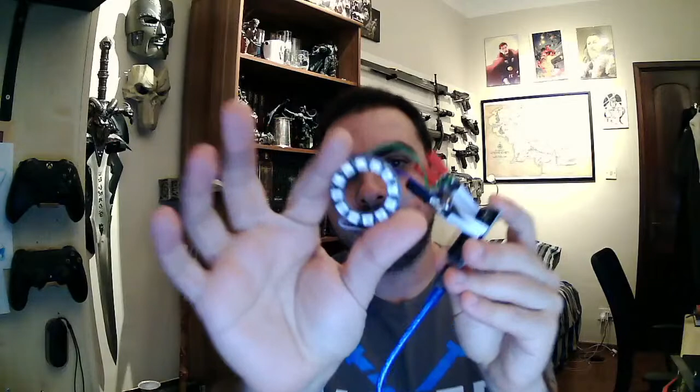And basically, this is a NeoPixel ring, an array of LEDs - in this case it has 12 LEDs, so they all light up in different colors. What I've done is soldered some wires onto their terminals and hooked them up with alligator clips, which are insulated by some electrical tape because I don't have the small feather pins for this kind of thing.

So yeah, I've been working on that and managed to successfully make it work. However, the first thing I noticed is that the blue LEDs don't work. It could be that this NeoPixel ring is faulty - I don't think this one is by Adafruit. Then something happened, something shorted out and smoke started coming out at like 1:30 in the morning, so I started to panic. But when I plugged it in again, the red LEDs worked, which is basically what I need this for, and the green LEDs didn't work anymore.

Just to show you what it's supposed to do, I've got a power bank here. I'm hoping I can hold it like this very gingerly so as not to cause any damage. I can't tell you what project this is for, but I can show you hopefully. Let's see, yeah it's on. I don't know if it's visible on camera, but the LEDs are lighting up and flickering randomly, making a flickering effect which is going to be used in a future prop project.

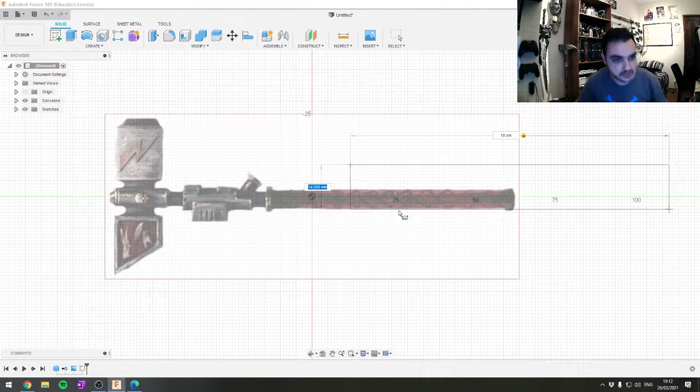I can quickly draw - actually I can get a box on this plane, and it's going to be 10 millimeters - oh no, let's do it like that, 100 millimeters, okay, so that's 10 centimeters. You can also write 10 cm over here. And the fist will, let's say I want to hold it in this position - obviously this will depend on the dimensions of the broomstick or whatever. I can use the stave back here, which is about 2.5 centimeters, yeah, about 2.5 centimeters, so I can do 2.5.

No, sorry, 2.5 cm. I'm not quite sure, 100 millimeters and 25. Yeah, okay.

So this box will represent my hand. Obviously, as you can see, the canvas itself is extremely tiny in comparison to the dimensions of my hand. So what I need to do is calibrate the canvas.

Okay, now if this is 10 centimeters, from here to here, let's hide it for now, we won't actually use that. And let's say I want this weapon to be a meter long in total.

I can right click on the canvas. Why is it not letting me? Should be able to right click. Oh, right, because I'm moving it. I should be able to right click on the canvas and calibrate.

Basically select 2 points on the image. Let's select the very top, it doesn't need to be very precise. Move the canvas over and select this over here, and currently that is a total of 126 millimeters, which is 12 centimeters. It's tiny. We want it to be a meter, so we do 1 meter.

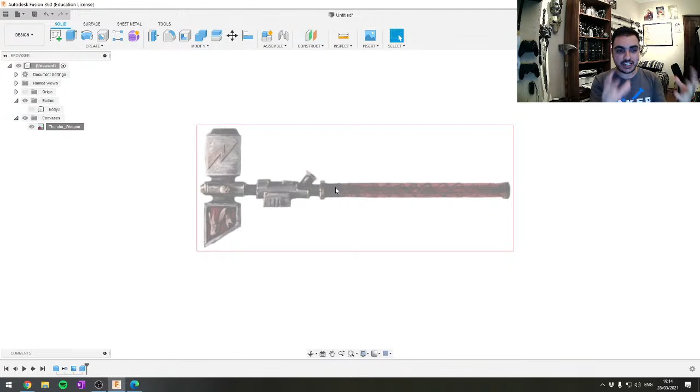Now remember that box before? See, that is basically the thickness of the area. So basically in terms of where my hands would go, if I have one over here and one over there, I think that is plenty of space to hold the hammer.

Okay, so like a small two-handed hammer. But as you can notice, perhaps it is a little bit too thick around the handle, the shaft there. So I will need to make some concessions.

Now, luckily, I can calibrate this to 2.5 and see. I can calibrate the thickness to 2.5. Let me remove this, let's recalibrate the canvas.

So let's take over here, and let's say we want this to be 2.5 centimeters, which is going to be the thickness of our dowel, whatever it is. Okay, and now let's see how long the whole prop is.

Basically, we can calculate how long it is by creating a line from this end to this end, and it will tell us it's 655 millimeters, so that's 65 centimeters, a bit more than half a meter. Now this is 30 centimeters, so 20 more would be about double, roughly.

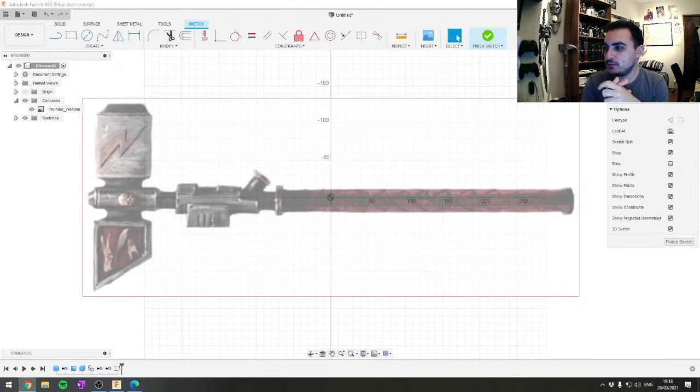Before any further ado, let's get to sketching. I'm going to be using a mixture of techniques, but I'll try to run you through it. I'm going to start with drawing some rectangles.

I can see that over here there's a bevel, so obviously the hammer is going to be beveling inwards, but that's something we can fix in a few steps later on, once we start extruding the model in 3D space.

Now over here I'm going to be taking approximate dimensions. I'm not going to follow the exact dimensions that I have on this, but I'm going to try and make it look right and make sense.

Basically I am selecting the rectangle tool over there, selecting the plane I want to extrude, and doing this. This is going to be the main head, the main cheeks of the hammer.

Now obviously this is going to be aligning with it, so I need to make sure that it is of about the same thickness. I think it's going to be 75.2 — let's leave it at 75.12. It's aligned.

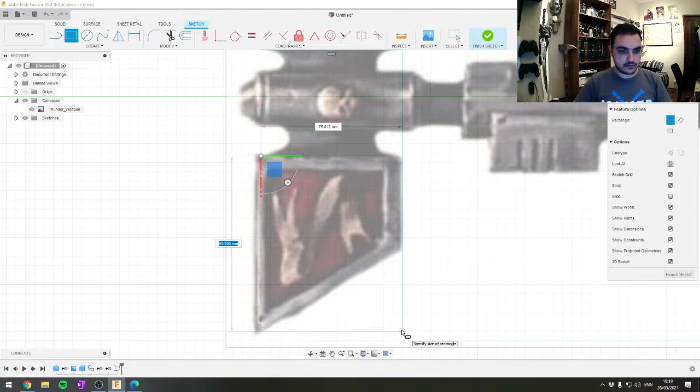Now I can do this. I can take the line tool by pressing L and extending it to wherever I want. Then I can deselect the line tool, select the border between them and delete it, which gives me a whole face.

I'm not going to worry about the recesses yet, because when I want to extrude, I want to do those recesses on the other side, on a 3D plane. I want to engrave them in, sink them in.

Even when I'm extruding, I'm going to extrude half the hammer and then mirror it, effectively cutting my work down in half, so both sides of the hammer will look exactly the same and I won't have to worry about displaying one side more than the other.

Once I have the whole model, I'm going to cut it up into separate pieces, and that's just to allow for ease of printing.

Not everything will be 3D printed. The shaft obviously won't be printed, but we're going to have the head which is going to be 3D printed, this sort of greebly thing over here, and perhaps this part over here.

I think these rings I'm going to 3D print and then color them in brass. Other than that, I think everything else is going to be like wood, but there isn't much else left, like the leather and wood. So that will be interesting.

Now over here I'm going to have a cylinder — actually I'm not going to do that right now, I'll do that later. Or actually, let's put a rectangle so at least we can keep in mind where it's supposed to go.

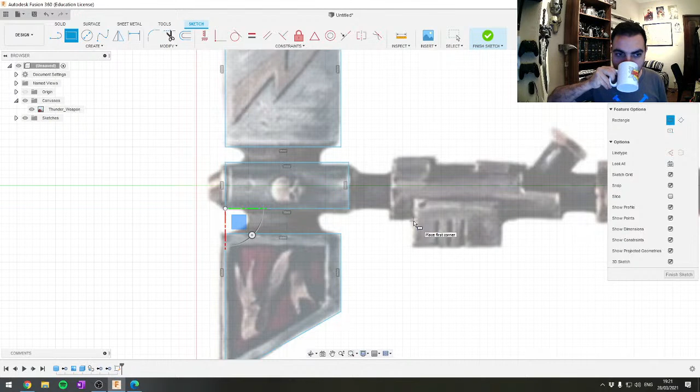The way to make everything in 3D is to extrude. Actually, before we do that — no, let's keep it, let us just extrude.

So we're going to press escape and then finish sketch, and it's basically giving us under sketches. Let's rename this to hammer head.

We can rotate it whichever way we want; I prefer working like this. So what we're going to do is select them by holding Control — actually we just need to select these two, pressing Control because these are the two faces which are going to be in similar dimensions.

We're going to go to extrude by pressing E. If I press E or go to create, over here we've got the extrude option under create and extrude. It's going to highlight them and give me the extrude options. As you can see, if I move it around, I can extrude it however much I want.

Now, this is going to be a longer piece, but it's a square face, so I have to make sure that however wide it is, it needs to be extruded up.

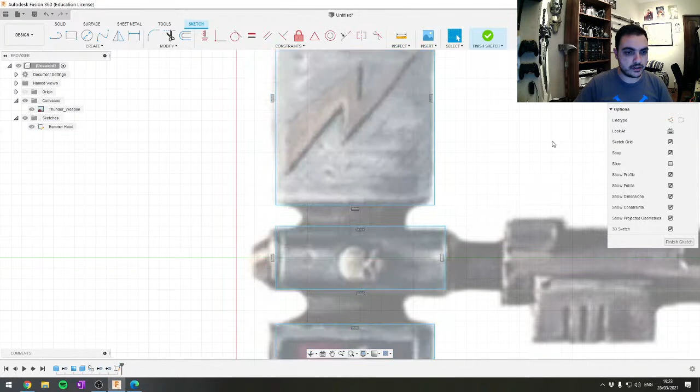However, if I take the dimensions, I can measure by pressing the inspect tool, select the two sides. No, not from there. I want to inspect this and this. The distance is 75.12. Basically, I can click to copy.

Now, when I go to extrude, press E. I can put my distance over here is going to be 75.12. However, that is the whole thickness of the hammerhead. I want it to be divided by half because I'm going to mirror it later on. So I am going to be working on half the hammerhead.

Basically, if I do slash 2, meaning divided by 2, if any of you use Excel, it will give me a thickness of half my width. Okay? And this is what we'll be working on right now.

Now, over here, I can see that we have the bevel going down. So let us press L to create another line and click on the surface, and we'll be creating a line over here. Now there are many ways we can do this, okay? So I just outlined this.

I can split this part, and I think that is what I'm going to do. Because basically, first let's see how far we need to go in. So this is 15.65. Let's copy that, 15.65. The split is just there to show me how much distance I need to the edge.

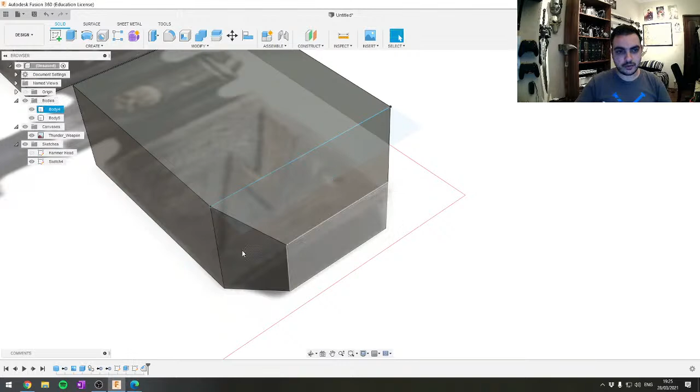I can take the sketch, I can delete it, it won't affect anything. And if we go back to the top, you'll see that this is about what we want.

However, I seem to recall that these hammerheads were not exactly continuous in facets. I think there's a little bit of a dip. So what I think I'm going to do now is either extrude the faces a little bit more.

Okay, so I'm going to select all these faces. I can't do all of them at once, but I'm going to do one at a time. So let's extrude them by 5 mil, pressing E and 5 mil. And extrude 5 mil.

Obviously this is going to be an issue, so I'm going to fix that later. Maybe 5 mil was a little bit too much. What we can do basically is—

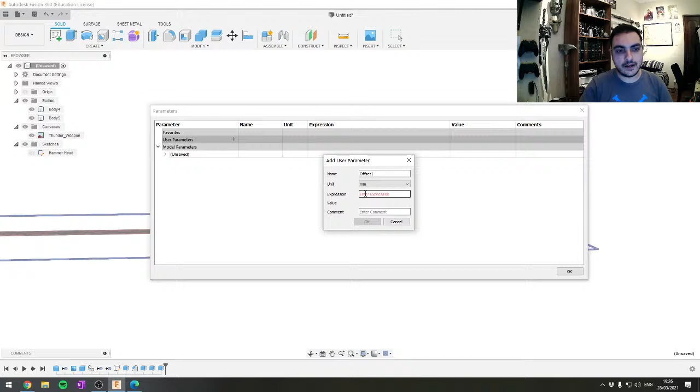Go to modify, change parameters. Okay, it opens up this window. I'm going to create a new parameter. I'm going to call it hammer, offset 1 for example. And the expression is going to be in millimeters. You can change it to any different kind of lengths, measurements, and let's say it is 10, for example.

Now, if I go back down to my timeline down here, I can just go back, and you can see that the model is going back in time. Model should be going back in time. Now I can do two things from here.

I can right click and delete all features after the history marker, which basically removes what I've done after it. Or using this, I can go back to this step, say this extrusion, modify it to take it back in time to how it was, modify it, say for example 2, and leave everything after it in relation to it. So if I use this face in another function in the future, it will take the 2 millimeters rather than the 5 which we were using before.

But we're going to be doing neither of that. We're going to be going back and delete all features after the history marker. Okay, and we're going to highlight the same thing. Now remember that parameter thing we did—if I extrude instead of giving it a value, I can extrude to give it an offset parameter, right? It's going to offset it by 10 millimeters.

Now, bear with me for a second. I'll take this, extrude by offset, and okay, take these and extrude by offset. Now, you're going to tell me that this is worse than before. Okay, this is huge. Of course it's huge. It doesn't work.

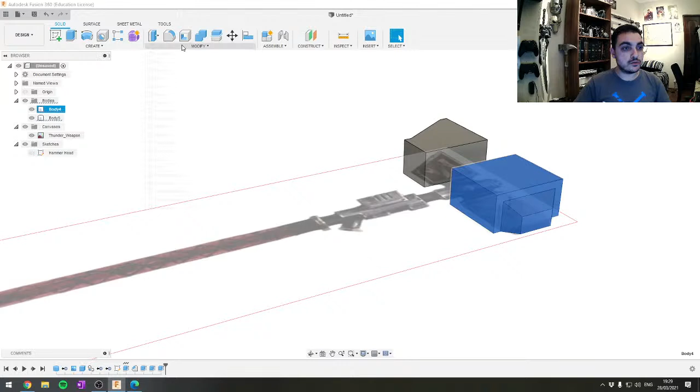The parameters, I'm going to change that 10 to 2, okay, to 2 millimeters.

Hello, Jason, Jay's Comics, hello, nice to see you here mate.

So we're going to change it to 2 millimeters, we're going to press OK, and as you can see over here, it changed all our values to 2. So that gives us the option to... I don't know why this is so slow. Wait, what did I press? Okay, there we go, double middle mouse button takes you to... apparently resets your view. So basically what the offset parameter did over here is...

Sound is very quiet, is it? Okay let's go, what's this? Is the sound lower than usual? Let's have a look quickly, let's go with the sounds. How's this, is this better? I'm hoping this is better. Okay, well apparently... maybe some people, okay perfect, sounds better now, no idea what I did there.

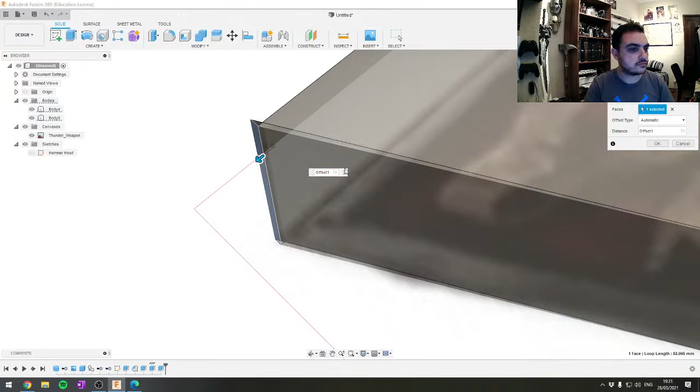And what I'm going to be doing here now is I'm going to fix this, you can see we've got some edges over here. So I think if I pull this with a Q, yeah, if I pull this the distance of the offset, I think... no, we need to pull it, well it doesn't need to be a perfect point, that's fine. Okay, if we zoom in, see it's got a bit of it, that's fine, it's 0.5 of a millimeter, it won't show up on the print.

Over here, what we're going to do is we're going to take the face, we're going to put a line on it, and the line is going to be from this point all the way to here, to this edge, okay? We're going to finish sketch, and then we're going to do another thing, which is going to be split body. I'm going to select the body, splitting tool, and the splitting tool is going to be that line. What it's going to do is it's cut it into two. See, we've got the hammerhead over here, and we've got the small piece over here. Remove the small piece, I have a clean hammer, clean butt of a hammer over there.

Now we're going to be doing the recesses. Now obviously here is not going to be equal over here, it looks like it is slightly thinner and slimmer on the top. I'm not sure whether I like that. I think I like the fact that it would be uniform. It could be forced perspective or something like that.

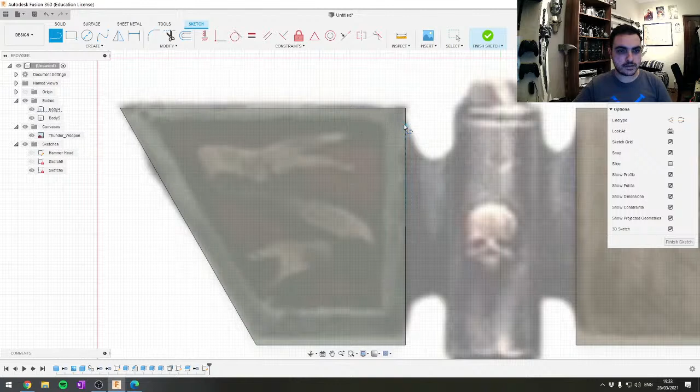Okay, I'm going to be using the line tool. Now I'm going to be eyeballing it, right? So if this is, okay, let's say this is 8... why don't you just do it at a centimeter, right? So let's take the line over here, okay, let's start somewhere over here, and we're going to do 10 millimeter, okay, so that's 1 centimeter in. Going to take this, that's 73.

Oh wait, I forgot to do something else, because I also need to have this in 10 millimeters, because that is going to be the corner where I start off from, okay, this is the point where I start off from. So I'm going to take this, go down to here, it gives me the 59.012 value, which I'm going to do minus 10, okay, so it's going to take it directly over there. So yeah, we're going to be eyeballing this as well, minus 10 millimeters. What I'm doing is I'm taking the whole length of it and deducting 10 mil from it. Over here, I think I want to see where the 10 mil ends.

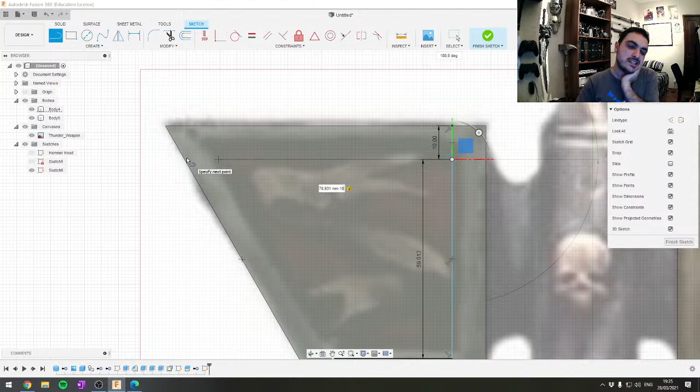I think what I'm going to do is take another 10 mil. Actually, I do have the 10 mil sorted here. That's 10 mil, and 10 mil is going to be somewhere over here. Let's do that again. We'll start from here, go to here. 78.931 minus 10 mil. Yeah, that looks about right.

Now we're going to just join these two lines over here. Now this looks extremely complicated, but it really isn't. We're going to take this face, and extrude again, but instead of extruding outwards, this time we're going to extrude inwards with a negative value. I don't want this too deep, so let's say 5 mil, that should be enough.

Now all these sharp edges, I don't particularly like, so I'm going to be filleting them, which means rounding them over. Using the fillet tool to select all the corners I want, let's start with a 5mm fillet. Actually, 5mm seems a little bit excessive, let's do a 2mm fillet instead.

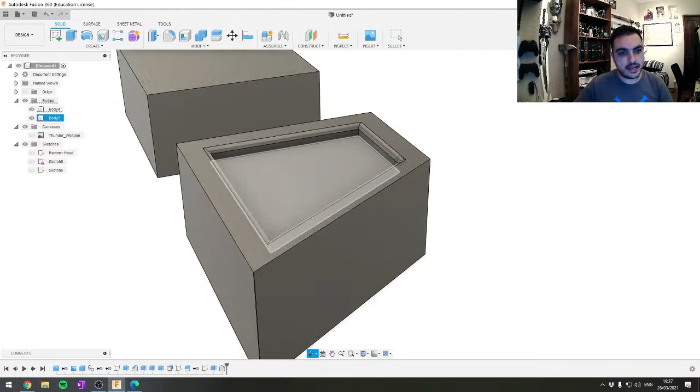Okay, I'll leave it where it is. Actually, I think that works fine. We can also turn off this so we can have a look at it. Yeah, I kind of like it the way it is over there. Okay, so that stays there.

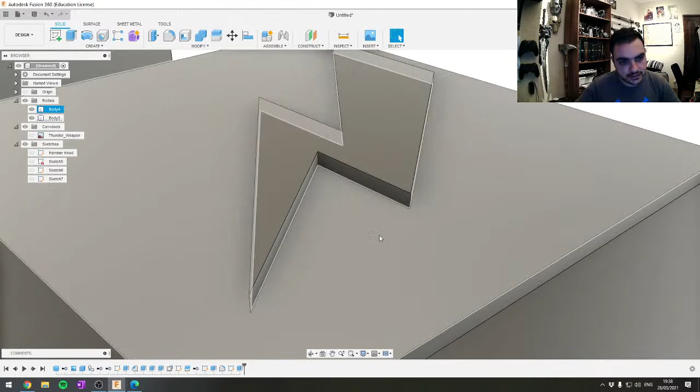I'm not going to be doing anything further to it, because if I try to fillet it, I think it will be a little bit much, and I don't think a 1mm fillet will really show on the 3D printer. What I'm risking is that this point over here does not get 3D printed, so I'm not going to fillet it. Besides, I think the rough edges over here will be very thematic of the 40k universe.

So, okay, good, let us carry on. Go back to the top view. Okay, we'll be working on these pieces very soon. So, now, over here.

The way to do this central piece, which is going to be cylindrical I think, is to look at this area over here. Now we can take the approximate - first of all, we need to find where the shaft is going to go. So basically we're going to be creating a sketch on this face, on these faces, either one, doesn't really matter. We're going to do it by creating a center diameter circle, pressing C. Now we know that the diameter of our broomstick, wooden shaft, whatever it is, is going to be 25mm, so that definitely has to clear it.

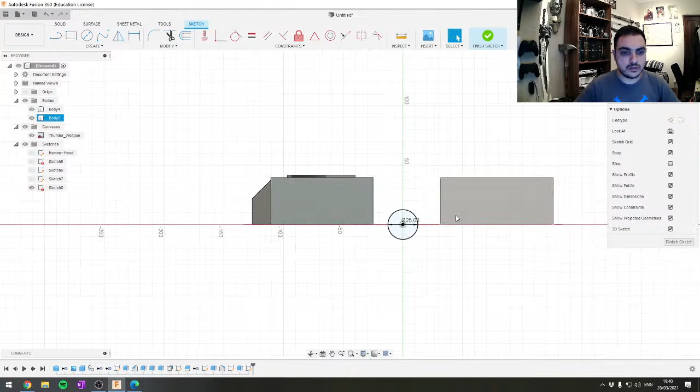So if I wanted to, I could just take this and extrude it all the way down to 65 centimeters. That is going to be our central shaft. Let's pretend that is our broomstick. Roughly, doesn't need to be perfect.

We're not going to be 3D printing it, but we're going to base our measurements around it. We're going to be creating another sketch on this face, right? It's going to be another circle, larger this time. Now to see how large it needs to be, it can't be much larger than that. If you do it at 30 mil, we're going to be needing some clearance, of course, so what we'll be doing is a sleeve which goes into the shaft.

I think we may have to sand the wood a little bit, but we'll figure that out later on. So let's do it at 30 mil.

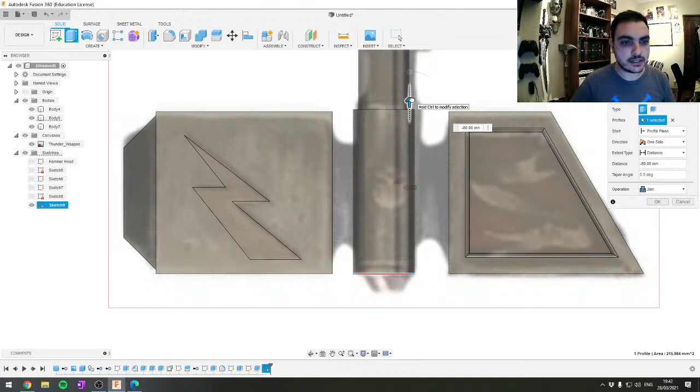Okay, now we are going to be extruding. I'm going to be extruding it backwards. I can use this arrow to take me back and forth. I'm going to be extruding it till here, which is about 85 or 80 millimeters. I think I'd like it to be extruded as far as these, which I'm clicking this. If I want to extrude it till this surface, I can basically click that.

Else what I could do is extrude it till here, which is going to be like where this doodad ends, somewhere over here. Looks about right. And then I'm going to split it. I'm going to be splitting it right now.

So to explain what I did, I'm just creating a sketch. I clicked on this plane, so it creates a sketch on this plane, which happens to be running down the middle. See the red part? That is the plane which I am sketching on right now. And I'm going to be drawing lines by pressing L, where I want the cuts to be.

So actually, let's say one somewhere over here. It doesn't need to be of any particular length. So that's one cut. I'm going to do another cut, actually past the taper, so past this bit over here.

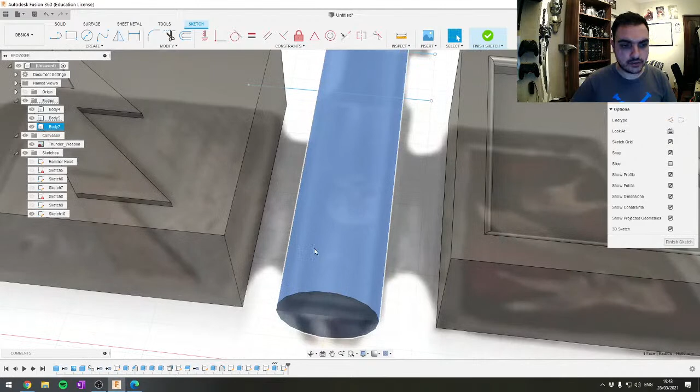Probably I want this to be a little thicker, so I'm going to select the surface of the shaft, which we said is 30 mil, right? Actually, what I can do is probably go back on. No, this is the sketch, finished sketch. Double click on this sketch, go on this circle.

It's not letting me change the diameter. Fine, don't worry, it's fine. Let's stop the sketch. I'm going to select the surface. Okay, I'm going to modify, press pull Q. I'm going to increase another 3 mil. Okay, so now it's 33 mil thickness. It's not really huge there, right? So that's fine.

Also, let's name them. So this is the cheeks, this is the back, and this is the shaft. Okay, now this is the shaft.

Okay, we need to make this hollow. We'll do that in a second. First, let us split everything.

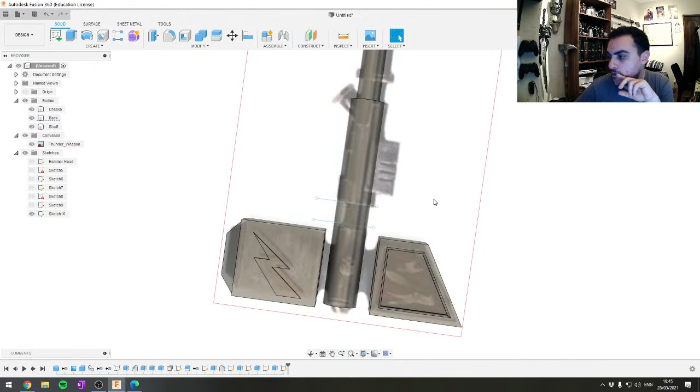We're going to be splitting everything by clicking the body, over here from the bodies. I'm going to modify, select split body. I'm going to select the splitting tool, which is going to be these two lines, and these two lines. It's going to split this model into those pieces using these two red planes as a tool. Okay, so it's going to do its own thing, and it splits them up.

Perfect. Before moving any further, however, I want to select, I'm going to make the sketch visible, sketch 8, basically is this part. I'm going to select the inner circle and extrude back, all the way. What that did is it hollowed out the tube for me, see? By reverse extruding.

Going back to the top, I would like to remove this centerpiece. If I hover over it, you can see on the side it is shaft number 1. So if I click over there, right click and remove. Do not delete, because it sort of messes with the model when it does delete. So just remove over there. Perfect.

Maybe increase it by another 2 mil. Now we're going to be chamfering back to this line over here, since there's a bit of a taper. So we go back to chamfer. That looks perfect, 5 mil chamfer is perfect.

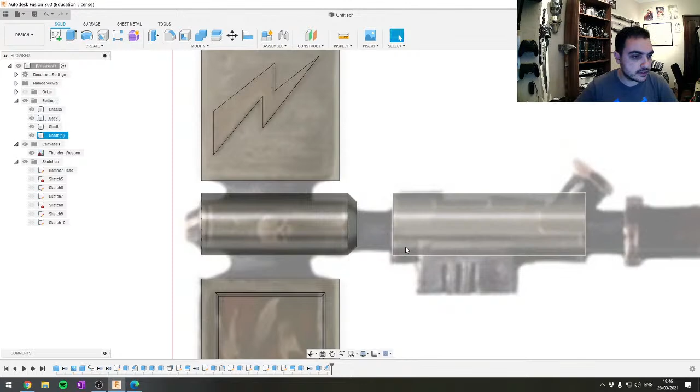Now this needs a cap on top, which you can see is slightly smaller than the rest. So I think what I'm going to do is, if we draw a line from here to here, let's say 25 centimeters. Perfect, so this sketch we can delete.

If we go on this face and press C, that draws a circle. When I click on the face, it automatically creates a new sketch. I'm going to click on the center, the exact center of the cylinder, and do 25 mil. I forgot this is the exact size of the shaft, which is fine.

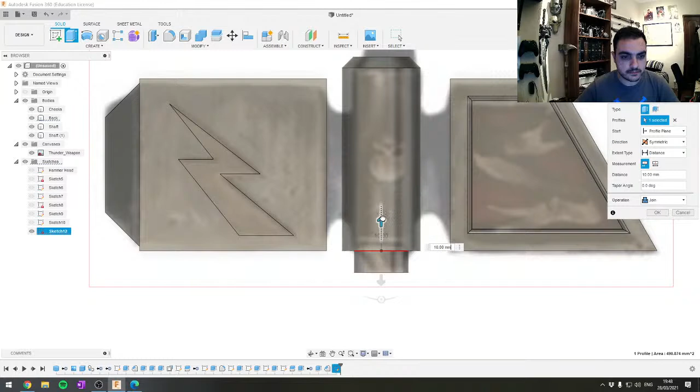What we're going to do is extrude it to here, say 10 mil, which is 1 centimeter. We're also going to extrude both sides, extruding inwards, which will plug it up so we can print it nicely. We'll do 10, and we can use symmetric so if we increase one, the other increases too. We're going to do a plug of 10 millimeters that goes out. Then we'll take this and chamfer it by 10 millimeters.

Oh, 10, okay, so that was maybe a little too much. Perhaps we don't want this to be an equidistant chamfer. If instead of an equal distance chamfer I select a 2-distance chamfer, it allows me to alter it.

I can make it as big or as small as I want. I kind of like that it has a little bit of a tip to it. Let's do that, and we'll set this to 4. That looks pretty cool. Perfect, this is shaping up to be really nice.

I have no idea how I'm going to make the skull. I'm not quite sure what I'm going to be doing there yet, but we'll figure it out later.

Now over here we can see it has a little bit of a contour. We can easily do that by pressing L and clicking here, which creates a sketch on the display. Let's do this, I'm going to come to here, then here, then back here. Okay, I'm going to press OK.

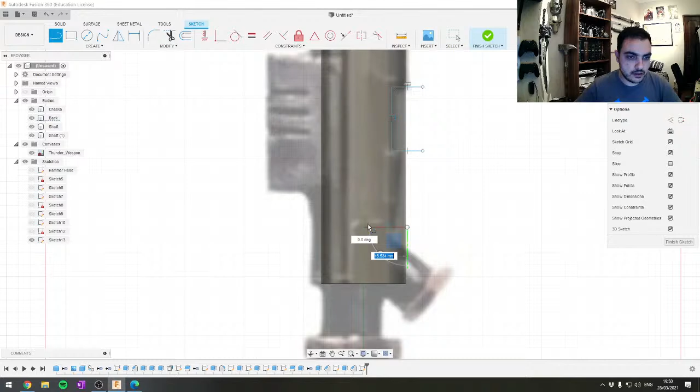So that's one cutout I'm going to do. I'm going to do another cutout here, so that's one line, and I'll do another line here roughly.

Now we're going to do an arc, a center point arc, let's do a 3-point arc instead. We're going to be eyeballing this, very much eyeballing it. Yeah, that looks about right.

Perfect, we can also take this and adjust it. Somehow I'm not managing to do it right now, but it's fine, I don't need to adjust it. This I can pull down to the edge of this arc. That looks like it's... ooh, careful. Okay, that looks fine.

We're going to take this body by selecting the shaft, because if I just click on it, it's going to select the face, not the whole body. I want to select the whole body, which is this part. Let's call it joint top, and we'll call this greebly. I don't know what a greebly is, I just like the sound of it.

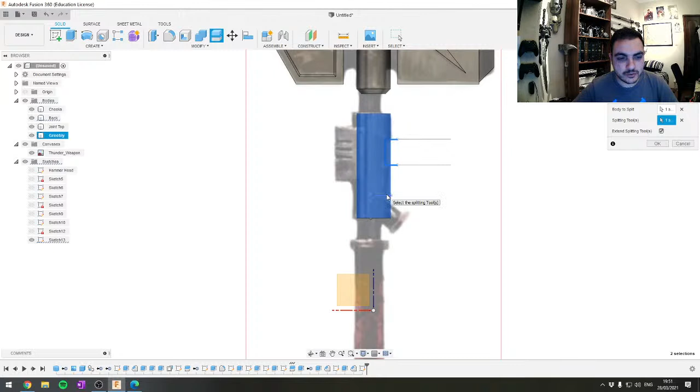So I'm going to select the body, finish the sketch, and split the body. As a splitting tool, I'll select that line, hold shift, and select this line. What it's going to do is cut out there. Press OK.

Okay, so that one and that one, I'm going to select them. So it highlighted the stuff that I want to remove, right click and remove, and that has cut it out to a nice hollow section.

What I'm noticing here is that this piece over here is a little bit too thick, so I need to fix that. Oh, okay, that was close up.

What I'm going to do is draw a line on this face over here. I'm not going to bother with the bottom face for now, and I'm going to say this is 5 mil.

I'm going to draw a line from this part to this part and this end to this end, and select 0 degrees, because otherwise it's going to take it at an angle. I'm going to delete this because I don't need that.

I'm going to take this side, press E, and extrude it back until it pokes through. Now what that does is, see, over here it cuts it out so that the shaft can be a little bit more visible.

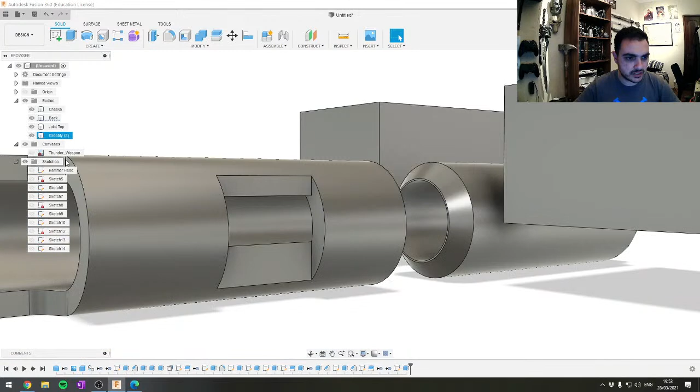It takes some time getting used to the whole three-dimensional thing, so sometimes it helps to just turn off the sketch.

Over here there's a bit of a lip, which I don't particularly like. It's fine, what we can do there is chamfer the edges until it looks cool. We're just going to take this edge and this edge, chamfer, and this time it's going to be equal distance, done in a way that looks cool.

What we can do is press I to inspect, click on this edge, and this edge is 2.758. Selecting that value and chamfering by pasting in that value, it basically chamfers equal distance, exactly to that value.

Now you may be wondering why I haven't done any work on this side. I could have just done the operation on both sides, but what I'm going to do is cut this model in half and then replicate it in the mirror, so I'm not worried about that.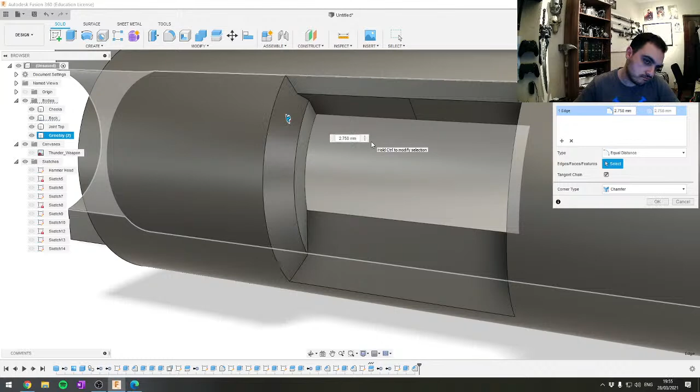Kind of like the idea of having a chamfer over here too, let's see. Can we chamfer here? Would it look cool? Maybe it would look cool if this whole thing... no, what if?

Okay, so if I inspect from this side to this point, 2.758. If I chamfer by that amount, oh, that looks nice. That's perfect, so I'm going to do the same thing over here.

Chamfer by that amount. Oh yeah, that looks really nice. Okay, it's almost looking like a lightsaber. That's another project for another time.

Let's chamfer these edges over here as well, by the same amount. It's not going to let me chamfer, not even by one. I think it's something to do with these faces over here.

Okay, what if I do this now? It could be because of the arc, or it could be because of that. So let's leave that as is, it's not difficult, we can always sand it down if we need to.

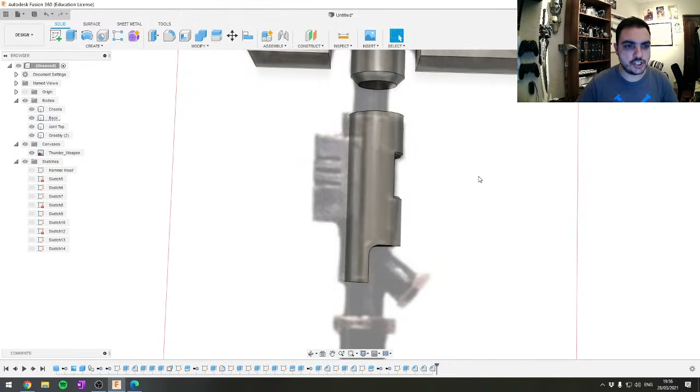I got just the thing for it. Out of curiosity, let's see how long the thing is. So from here to here, it's about 23.6 centimeters. It's not incredibly huge.

23.6. Well, I mean, kind of wanted it to be a little bit bigger. I guess it will have a little bit more at the front, so about 30 centimeters. Oh, that's decent, I think.

If I do this, I inspect from here to here, that's about 25. How is that possible? Yeah, so we said in total it's 25, like the hammerhead.

Oh yeah, that's decent, right? 25 centimeters for a hammerhead. I mean, that's bloody decent.

Okay, let's carry on. We're going to be putting a rectangle on this side. Let's roughly... wait, I think we have the wrong plane selected. Perfect, press R for rectangle, and then select the plane.

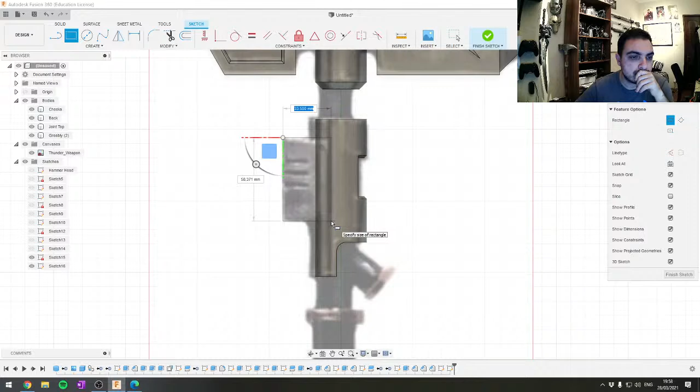Okay, that's about right. Now I want to extrude this to the sort of thickness, I think, of the circle, and I can't do that by selecting the face of the circle. It doesn't work that way.

However, I can click a point on the surface of the circle, which I know is the apex point, and instead of cut, in this case, I'm going to select new body, because I want to work on it as a separate body for now. Obviously over here you're going to see that it juts into it, and we're going to be fixing that in a second, no problem.

So I think this has a little bit of a rounded corner. There's a bit of a rounded corner. So we select fillet, we can fillet these parts. This seems to be like an electrical radiator kind of thing. Let's do it by 2 mil, might be a bit much. Let's do 1.5. That's a good compromise.

Okay, over here. Now we have these fins to cut out, and I think the best way to do that is to do the middle one and then copy the design over, if I can remember how to do that. So I'm going to just draw a straight line on this face. Well, let's just do all of them. Select a straight line on this face and a straight line over here. Okay, just did 3 straight lines.

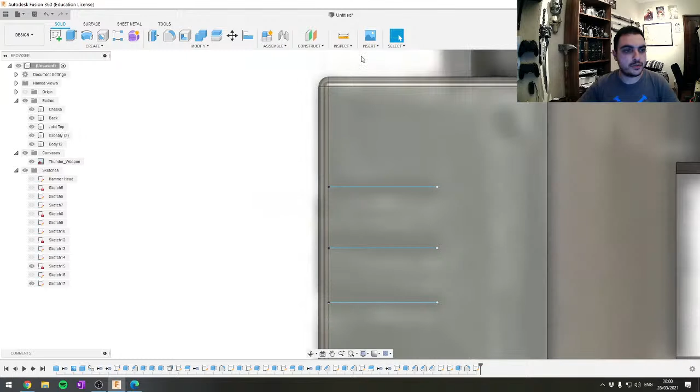And now I am going to draw, I think, a circle. Actually, I don't think I need to. I'm going to stop here, go to create pipe, select this tool. The tool is going to be that line over there. I'm going to select how much of this section I want to cut out. If you say 5 mil, for example, it's going to be 5 mil. I think 2.5 is more than enough over here.

2.5 looks about right, so we're going to be doing that. Did its own thing. Now I'm going to select this face and extrude it out so that I eliminate it.

And I probably want to sort of round this face. Now the way I can do that is by using another function, which is selecting this face over here. This is the face of the pipe, and I'm going to be doing a create and revolve. If I managed to find, or was it under modify? I'm pretty sure it's over here. Revolve, there it is. Revolve, and I'm going to be selecting the profile.

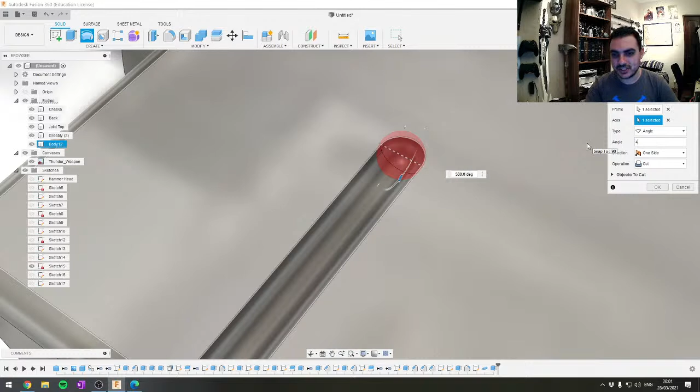All right, selected. The axis is going to be the edge over here, and I can choose how much I want it to revolve. So if I want to revolve it, for example, just 45 degrees, it's going to revolve it forward by 45 degrees and have a nice slant. But in our case, we want to do a 360 to make sure that it is cut out. It's going to cut out a spherical edge to it, and I think that's a really neat tool to have in a 3D modeler's arsenal.

Next, we're going to be extending this. Okay, now we're going to be doing the same thing. Basically, create a line on this face. I'm going to try and select like the center of this. I'm going to try and select the center. Come on.

Oh, come on. Sorry, I apologize about this. It just created a line over there, but I don't want that to be over there. I'm going to try and move it forward over here. It didn't move. So what if I take the points and move them? I can't either. Okay, so now let's redo the thing.

So if we take a line, oh, from where is the sketch? From this point. And take it down 90 degrees to the bottom over there. Now that is not going to be like, that's not at the edge over here, but we can fix that by basically creating a new pipe.

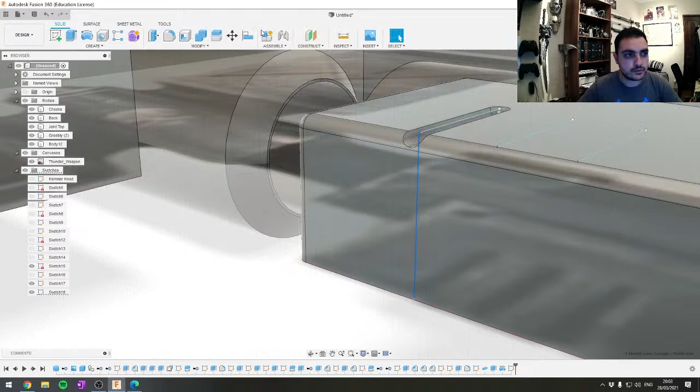Okay, so finish sketch, create pipe, do the same thing, but instead of cut we do new body. Okay, and what that does, it created a new body. Hide this. It created a new body which goes over there. See, now I want this to be moved.

I want to move that to, actually I can use a very simple tool. It's called an align tool. Can go to modify, align, select the center, okay, of that face and align it. Okay, my bad. Oh, can probably still do this. Align.

This face, no. So if I align this face with this, of course it's already there. It doesn't matter. Let's move this. Let's move the whole body over here. Just going to be eyeballing it again, shouldn't be difficult. Yeah, that looks about right. Okay.

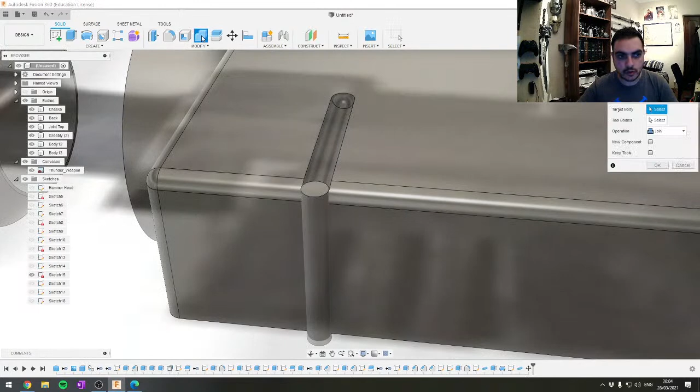We're going to be removing. Now I'm going to combine, and instead of join, we're going to be doing a cut, taking the first one and the second one, selecting those. It's going to do this edge. Now this is a little bit of a sharp edge. I don't like it much over here.

What I could probably do, let's see if I fillet this, let's see if we can. Oh, this is just shoddy workmanship, I think. It's just shoddy. Or does it work? By 2.5, 2.5.

Let's see how it looks. The edges sort of pucker in slightly. No, I don't like that.

So we're going to be going back to our first pipe, okay? The first pipe was this one, the first cutout we did. And we're going to remove everything after the history, which we did. Go one step further back and we're going to go on this sketch that we did over here. Now we're going to be extending the sketch further.

Come on, okay, I'm going to be extending the sketch further by... Let's... wait, is it on which face is it? Oh, it's going down. Is it going down? Yes, it is going down.

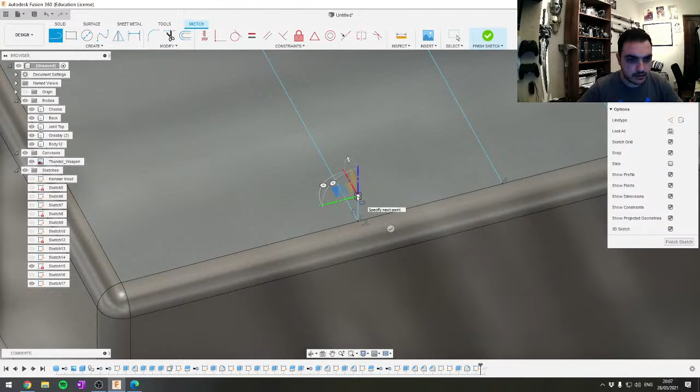See, yeah, it went up. It's fine, let's just delete that. I'm going to be taking this, drawing another line. Set it to 90 degrees. Okay, now it is on the face we want it to.

Okay, so basically we're going to extend it at 180 degrees, so it's locked in a straight line. I'm going to go further till here. Okay, now we're going to go down. I'm going to press OK.

I'm going to go from here. Actually, I'm going to go from here. Okay, now it seems to be at 90 degrees over here. Okay, so we don't want a 90 degree over there. Maybe we want... no, what am I doing? No, it's still stuck on the same plane. It doesn't matter, let's leave that there.

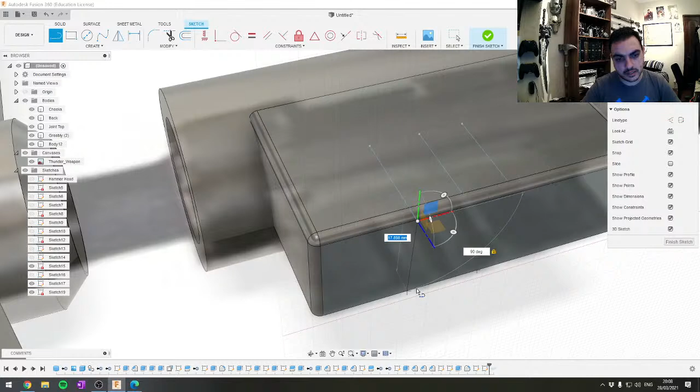Finish sketch, I still need to see the sketch down. So I'm going to go here, press L, and draw a line down by 90 degrees, which goes down to... yeah, it's drawing on this face. Perfect, okay, doesn't matter, let's go there. All right, back on track.

So we're going to be doing the pipe thingy now by doing this, but we're going to be selecting the tool here. Okay. Why didn't it work? It's okay, I think we can do a pipe on this one as well. Let's just do a pipe on this one. Create pipe.

Path is this. Ah, that's the problem. See, I created it too far out. Yeah, that figures. So basically this is actually good. If we go to select this, needs...

Oh come on, why can't we move it? Sometimes these sketches just don't. Okay, so this wants to move, fine. So let's move this. Of course, I'm not selecting the right sketch. If I select this and move it inwards, to the surface...

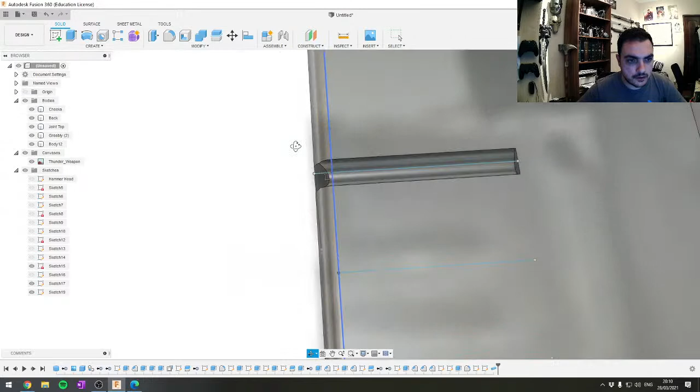Aha, okay, let's zoom out, and now we finally... oh, it still doesn't look so nice because obviously it's not an arc. These little things, you kind of get used to them. They're not very interesting to do, and they're like the difficult part of 3D modeling, trying to wrap your head around everything. So I'm going to have to do a nice arc,

or just leave it as is. Just leave it. Sometimes you need to know when to fold, right? I'm going to be undoing all my work until I get back to here. Okay, this is where we were earlier before we took the tangent, and that is fine. It probably won't show up on the 3D printer anyway.

Okay, so we need to replicate these faces. So we're going to be doing create pattern. Okay, pattern, it's going to be a pattern on a path. And the pattern is going to be a selection of faces. We're going to be holding down shift, selecting these faces, going to be selecting the path, which is going to be this over here. All right. Now distance is going to be, I don't know how far we want the distance to be, but basically we can just eyeball it over here.

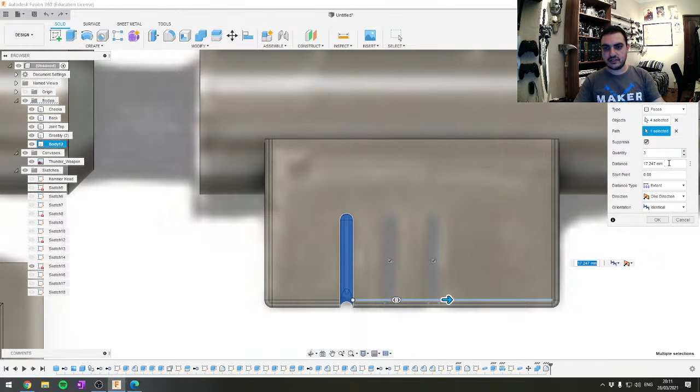Okay, I'm just going to have it somewhat there. It's like 17, let's say 18 mil, just to have a nice round number. Press OK, wait for it to work, and there we go, we have done that.

Now there seems to be some sort of screw there or widget. Probably I'll drill a hole there and put an actual screw in, give it a little bit of authenticity, but I think that is looking fine so far.

Okay, so a few steps left. Now I'm going to turn off the sketch over here, and we're going to be dealing with these things because this and this need to be combined. So we're going to select both of them, combine, select join, press OK. Now this is one greebly.

Basically I need to get rid of this. So I'm going to select the greebly. I'm going to split body, and as a splitting tool I'm going to select the inner circle of it. It's going to cut it around there. Okay, basically this inner part we can remove, and we have a nice clean hole over there. Should we remove this? We can see it's nice and clean.

Now we're almost done. Let us do the top joint, then we're going to be splitting it in half and we'll be done.

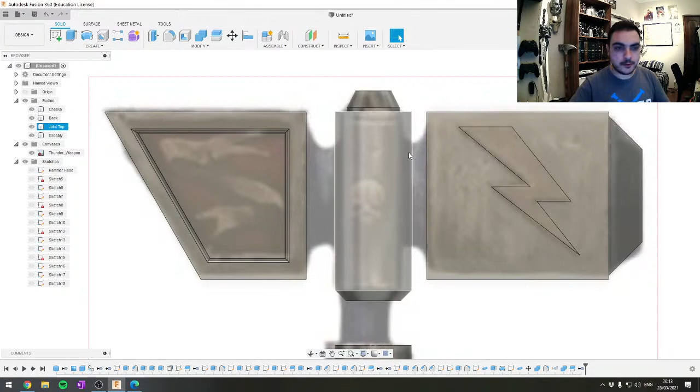I know what we could do. Over here we can also chamfer this slightly, like with a 2 mil or even a 1. Let's do a 2 mil chamfer.

Got any good comics recently, Jason?

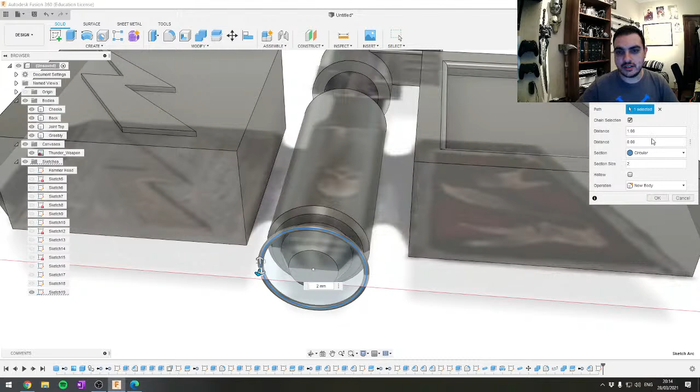Okay, so basically what I did, I created a ring over here. I'm just going to select the outline. I'm going to create another pipe over here, finish sketch, create a pipe, and this time, let's do a 2 mil this time. I can also change the inner diameter by changing this value over here, but it's fine for me now.

Okay, now I'm going to take this body, I'm going to move it further in, right about here. Okay, press OK, and then I'm going to combine these two bodies by selecting cut. Okay, and it will create a nice detail in there, which will take some weathering very nicely.

I can also chamfer it further, but I think that's fine. Yeah.

Filming it, or at least try to. Your first two videos are really cool. I really encourage people to actually have a look at them.

Now here comes the tricky part, we need to have these two faces sort of merging with the center shaft in a sort of curved manner. Now this curve isn't a problem, and I think I would like to move everything back, so I'm going to take the joint top and the greebly and move them slightly. Actually, I think that's a little bit too much. Oh no, not rotate, just I think that's about perfect.

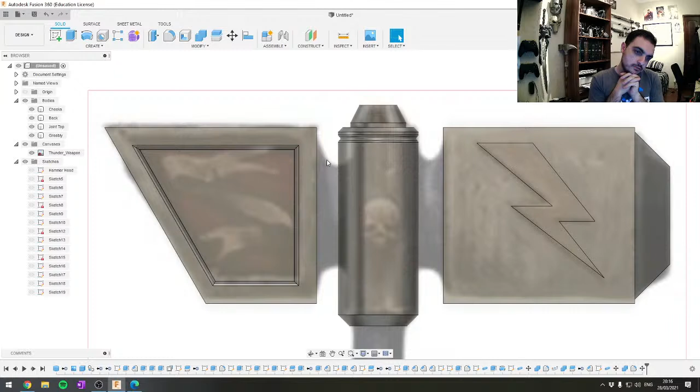I think we're going to be using the same pipe function, but we're going to be working on another. Okay, so let's do a rectangle. We're going to be doing a rectangle on the plane, which is like the middle part, okay? We're going to be selecting the parts where we want our rectangle. Okay, first we need to define the width.

So we press inspect, this face to this face. The distance is of 9 point, this one, the minimum distance. Minimum distance is the shortest distance between the two faces. Obviously it's going to be from the circumference of the circle to the face, or it can take it from the center to the face. It's going to be

Actually, you know what, let's undo that. Let's change that to a straight 10 mil, and we will move everything. It's fine, it's not going to be a problem. We'll move everything. Now this is down there at the bottom.

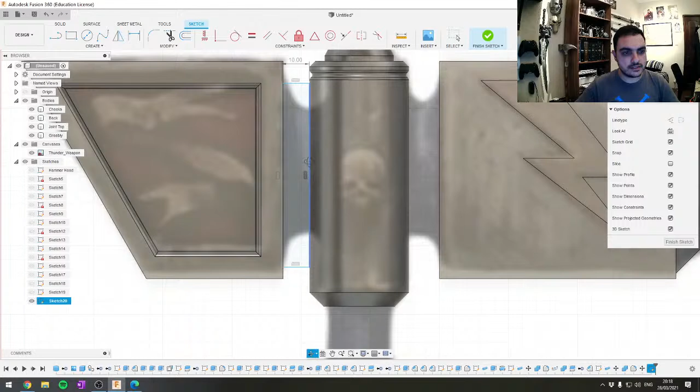We're going to need to extrude it by this much as a new body. This much actually by 10, because we said that we're going to use a 10 mil.

10 mil, however, divided by 2, so we're going to be using 5 mil, because it's going to be duplicated on the other side. It's still not a perfect joint, but we'll make it perfect. It's fine when we're done with it.

Now I am going to make, I think, either a chamfer or a pipe. I think a chamfer, or a fillet rather. So we need to take this point, this. Okay, so let's try a fillet first.

No, let's try a fillet again. We'll be filleting this side, and this side, but it's going to be an inverse. So we do -1. No. There was a way to do it. Setback, right? Setback? No, it's not a setback. What was it? There was a way to do it the other way around. No. Okay, let's do it the way I know.

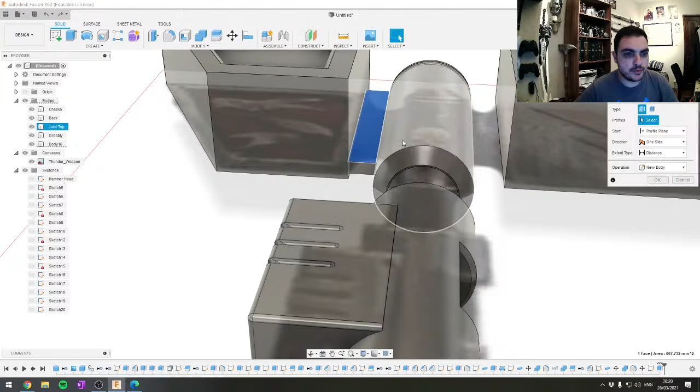This is going to be incredibly tiny though. It's not gonna work. No, it's not gonna work. So maybe we do need this to be another 5. Okay, everything is getting in the way. So let us remove the back, the front, and the joint on the top. Otherwise, the commands that we do on this one are going to affect everything else.

So let's do a pipe here first. Let's do a pipe. Can we do an ellipse? We have to draw the ellipse first. Okay, so let's draw a sketch on this face.

Now if we go on this face, I can draw the contour of what I want, right? How stupid of me, you know what I could have done? I can basically draw a line, right? So from here go up another 5 mil, sorry, 5 mil, and from here draw an arc, a 3-point arc. I think this will do just fine.

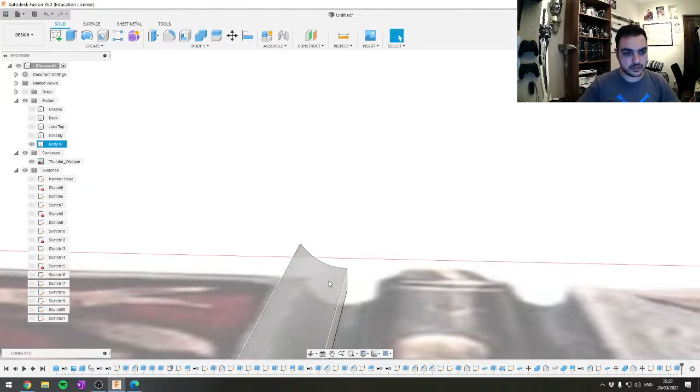Yeah, oh this is perfect. And if I do this and extrude it to the back, see, now I have this. Now to do the wraparound, we'll be doing the thing in reverse. Okay, we're going to be going underneath the model. I'm going to be creating a line over here. Okay, we're just sketching on the bottom of this. We'll take a 5 mil chunk over there and let's see how, and take the arc from there to there.

Let's do an, no, not appearance, I need the arc. Okay, come on. This is sketch 22. So this is, wait, what am I looking at? That is the one that, this one I need to edit. Edit sketch. Okay, where did you put me?

Okay, I'm on the bottom. Perfect, okay, bottom. And I'm going to create an arc, a 3-point arc, 1, 2, 3. Perfect. Now what I'm going to do, no, it has to be the other way around. This has to be over on this side. Let's do it again.

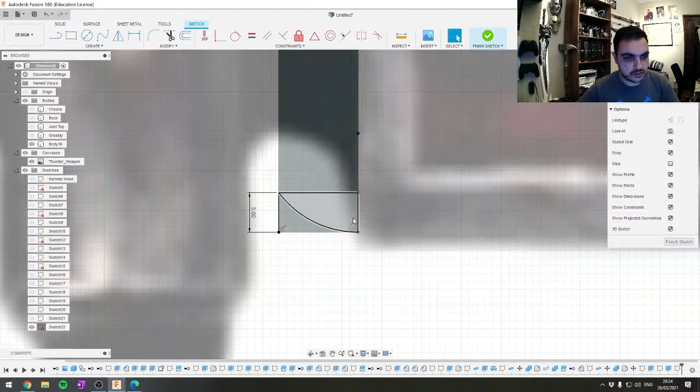If I take a 5 mil over here, do an arc. Perfect. Am I doing something wrong? I'm doing something wrong, aren't I? This arc needs to be the reverse. This arc needs to be in reverse. So if I do an arc, it has to come out of here. Yeah, if I do an arc, there we go. Okay, extrude this, -100.

Perfect, that is what we were looking for. Finally. Okay, looks about right, doesn't it? Maybe let's push this face a little bit back. We can't push it back, it's fine.

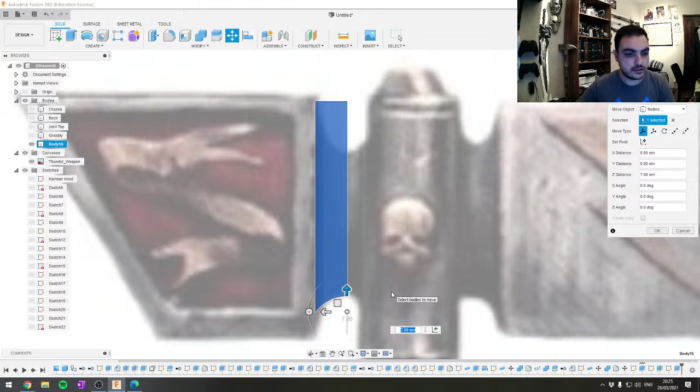Okay, let's create another sketch from this part here. Basically what we are doing is just creating a smaller sketch. Okay, wait, on which face is it? At this point I'm just messing things up. Let's go to the top over here. We just need to take this down. Let's move this, move to here. That is like around the right place to have it. Okay.

Now we're going to be taking the center point again. Press I for inspect, taking that value, which is 66.773. Draw a line on this plane, starting from here, taking it down to here, divided by 2, and then take another line from this point here at a 0 degree angle.

Okay, delete this line, split the body using this tool. Okay, we remove this part. Basically that is half of what we need, right?

So we take this part and we do create and mirror. We're going to be mirroring the body using this mirror plane, using this face as a mirror plane. We press OK. Should have joined them together as well, and this is going to be the gusset join. As you can see, it is perfectly mirrored.

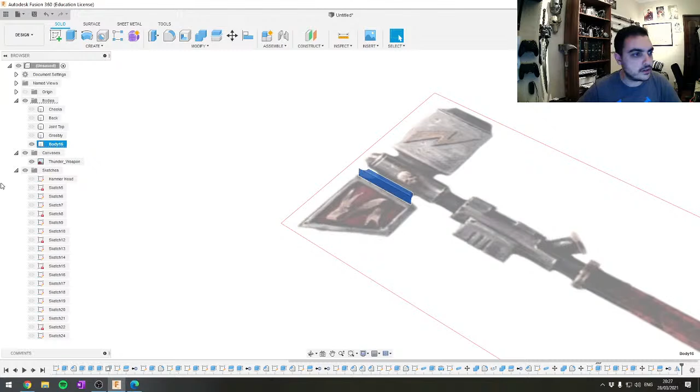Now we need to do one last thing. We need to do it on the other side as well, but we'll get to it in a second. If we take Greebly, we make it visible. The joint at the top, make it visible. The back and the cheeks. You can see that this goes into it and is not perfect.

So what we can do there, very easily, is align both faces. Let's take the back and move it by pressing M or clicking the move. Let's move it far out over here. Going to select the align tool, going to select the face anywhere, not any of these points, and then selecting the face over here and pressing OK. Now that has aligned it with that part over there.

The next thing we need to do is extend the face of this joint. It's very tiny, it's not going to show, but we need to extend it into this piece until we can, let's do a cut so we can see where it's cutting into. I don't want it to go so far in, but it wouldn't be a problem if it did either. Let's put them by, press join, okay. So now it joined them together.

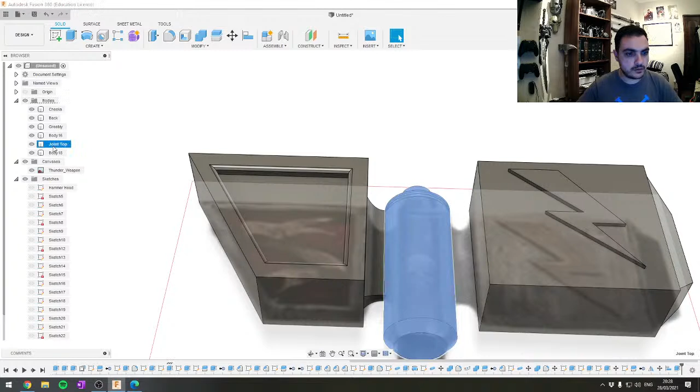Actually, before we do the join function, let us do the new body. We'll take this body and these and combine them. Basically, what we're going to be doing is taking this part and mirroring it again by create mirror, but instead of using this as a mirror plane, we're going to be selecting the plane down the middle.

Okay, we just mirrored it, we didn't do anything else. Now I just need to make sure that there's a 1 centimeter gap in between these two, so I'm going to select I to inspect this face and this face, and the minimum distance is 11 mils, so I need to move it slightly bit closer.

So in this case I am going to move the cheeks and move it, clicking on this arrow, moving it by 1 mil. Okay, so now the distance is set properly.

I'm going to take this body over here and move it all the way back here, just so I can easily access it. Again, I'm going to align. Selecting the face. No. Again, align face and this face. It's going to align them like that, and I'm going to take everything.

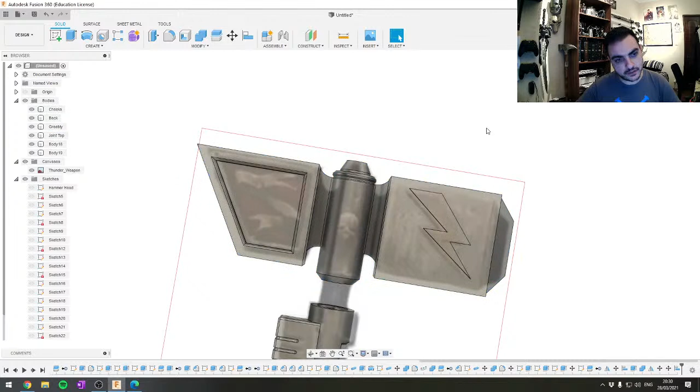Take the cheeks, the back, the joint at the top, the body, and the body. Actually I think I would like them to be a little bit further down, so I'm going to take the cheeks and the back, the body and the body, press M, move them down. Here looks about right. Perfect.

I'm going to select everything except the greebly, and I'm going to join everything together.

I'm going to do the split body function again to hollow out. Actually, I can just if I turn this off and I turn this, I can select these faces now. They're individual faces, okay? If I press those two, press E to extrude and click on the face at the back, I'm going to extrude them to the very far back. So I have that part, I have this part, I have this part, so everything looks fine.

Let's get the greebly here. Let's finish working on this part. I think I want to have some chamfers over here. Let's do 5 mil, it's a bit too much. 3 mil chamfer looks just right over here. Let's do a 3 mil chamfer over here as well to mirror it.

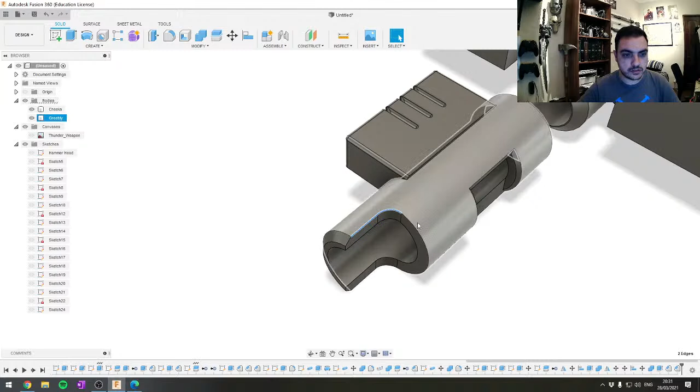I think that looks okay, don't you think? Do we need to see if we can do this as well? Do we need to chamfer by 3? Don't think it will let us. Oh, it will. Maybe 2 over here. No, let's leave it as it is. I think it's a nice aesthetic to have.

Now this part we need to extend until it just about joins over there, making sure that it's still completely hollow. It is. Now we're going to be doing the last one.

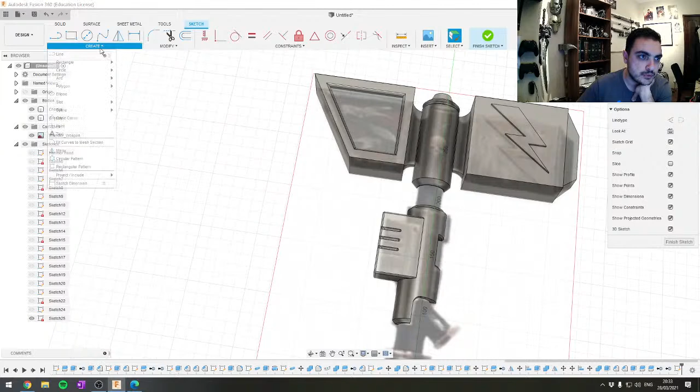Let's create a sketch on this plane. If we put text in here, I'll just put the text over here. And as a sample text...

See, omega alt code. So alt 2, 3, 4. Oh no, it doesn't work. Maybe alt. No, that's not the right character I want.

Basically, I'm looking up online what the alt code for omega is. Alt 937. No. Apparently it's not working. Maybe 969. No. 974. No. Hey, I can just copy it.

Oh yeah, I could have just copied it from online. Didn't need to look up. Didn't need to look up the alt code for it.

Oh god, okay. So the height, let's say height, let's set it to 51. That's a little bit too big. So maybe 25. Yeah, it's not quite a long day as much as a long week.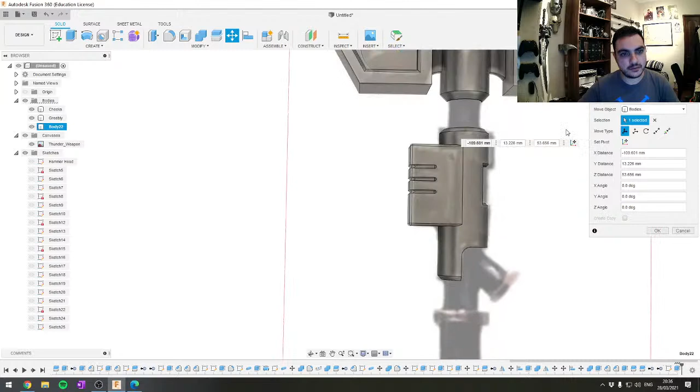We're going to eyeball it around the middle, like somewhere over here. Okay, I think that is a little bit too small, so maybe we can modify and scale it.

What if we scale it? I think that is fine. Let's move it again. If we select the square, we're moving it along the plane, okay?

That is cool, but now it is a little bit too far up. It doesn't make sense for it to be here, so I'm going to align it by selecting this face and selecting this face. Squishes them together.

And that's looking nice. Maybe putting it about here. That is an option. What do you guys think? Do you like the Omega over it?

What if we look up Omega Ultramarines? Oh wait, it's upside down, right? It's not an Omega, it's a U. I almost made a mistake.

So basically, I'm going to move it, but instead of moving it around, I'm just going to flip it upside down. Okay, and just move it in its right place. That's much better - Ultramar, the U of Ultramar.

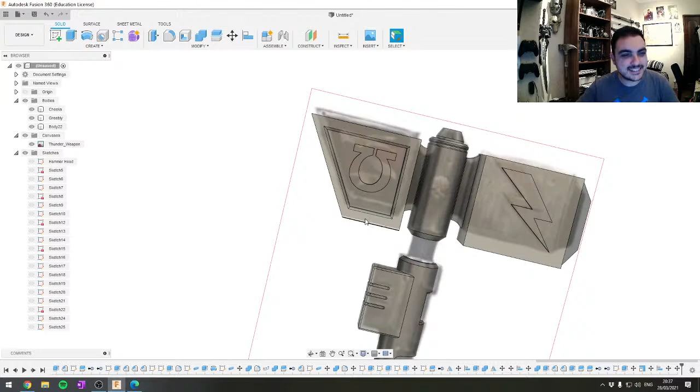I'm actually quite proud of that. Not of my mistake, but of thinking about it. That's actually pretty cool. That's a pretty cool thing.

Okay, so I'm going to just take the cheeks. I'm going to call it the head, now the hammerhead. Take this and combine it together to create one body.

Now here's where the magic happens. We're going to be taking these and creating a mirror of them, these two bodies, selecting the mirror plane on this side. I'm going to be joining them. And now we have created a 3D version, a perfectly symmetrical hammerhead and greebly for the thunder hammer of the Space Marines.

And see, even I think these parts may be a little bit too thin. I think I would rather extend them a bit further out. But we can make that work. It's fine, we can just go back and make the sketch larger on one side than the other. We might have to just redo that whole thing.

I think I'm just going to have to redo this part because it's too thin. That needs to be stockier, thicker. Definitely.

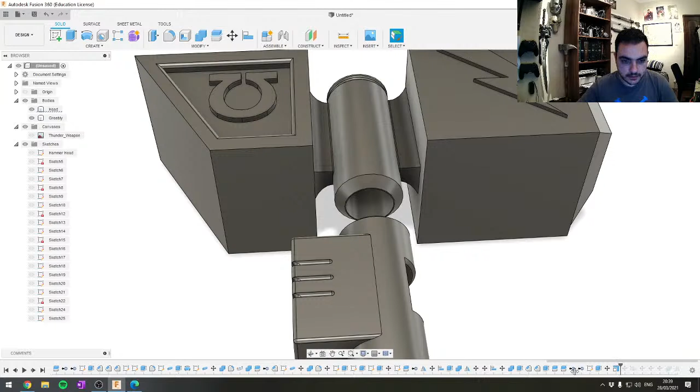So the way we would do that is by rolling back. I think somewhere around here it was. Yeah, this is the half that we're working on, the stuff that we mirrored before we merged everything together. Now what we are going to do is...

Okay, what I'm going to do is select this face, move it up by, say 1 centimeter, actually by 2 centimeters, yeah, let's do that. Now I'm going to extrude this by 10.

And it's joining here, but let's hide that so it doesn't join to it. Now get it back here. Let's see how this works, because I think it's going to create some errors if we go to the end of the process. Yeah, see, it created this thing over here, but it's fine.

We can fix that. What we can do is probably if we extend this piece over here, it's going to extend to here. Okay fine, we can just join them together. We'll do the same thing with it earlier. It's fine, just hide this, select this, and

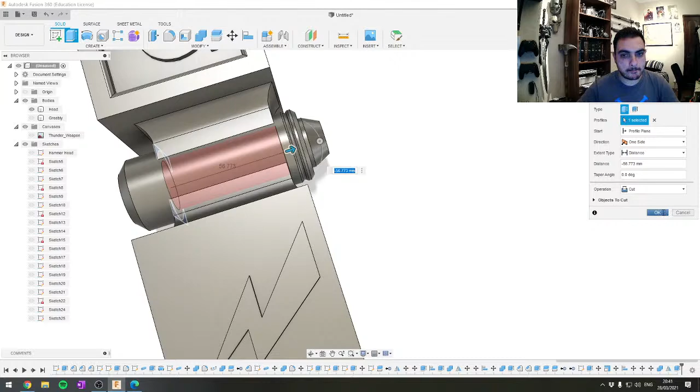extrude this part to the very back until we want it. Right, it's like somewhere around here. Yeah, that's enough. That's perfect. Okay, and we cleared out the middle sections where we hollowed it out over there, and that looks a lot chunkier, a lot beefier.

Hey Max Black. What do you mean with like cube objects? Because basically, if you're using like the picture behind it, like if you go back in the live stream and you see what I did, I started off by using this thing. But the techniques that I use, like the sketching and the extrusion, don't need to have the canvas behind them really. It's there just to give me a reference.

Okay, I could have just as easily done this with a little bit more difficulty really, using these tools, using the same functions that I did.

Now what I'm going to be doing is probably go back and chamfer all the edges. I don't like having sharp edges on my props. That's always going to be an issue at Comic Con, you know.

Yeah, this is the edge that we had earlier. Okay, let's extend it further. We can just cut it out in a second. Ah, see, perfect, came to a point. Now let us chamfer everything.

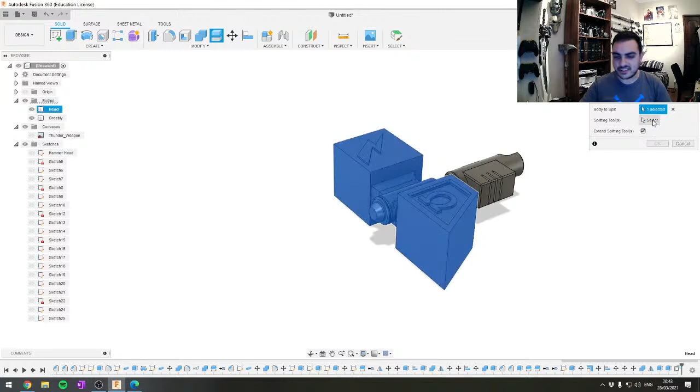Let's split it one more time because I would like to chamfer a lot of these edges, and it's easier to just do them on half. Okay, as a splitting tool I'm going to use this. Take the bottom part and remove. Okay, the inner parts probably can remain non-chamfered.

Because I don't think anyone can hit against them, but I think I'd rather have these like this and this, just a very soft chamfer, like a 1 mil or maybe a 2 mil. It also gives it some depth and detail as well. See?

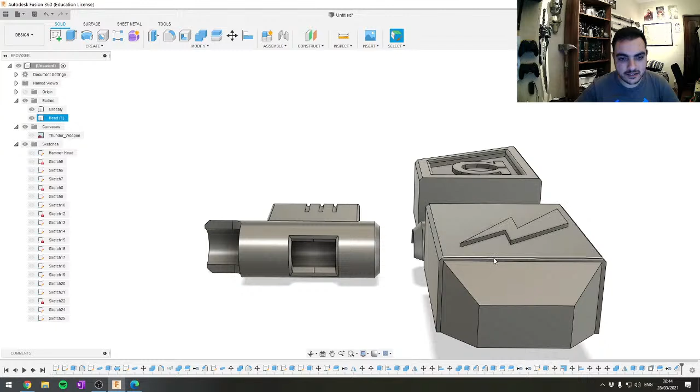I always click somewhere else by mistake. Come on. What if I chamfer this by 2? Okay. And we will chamfer this by 1.

I don't think that's going to really show up on the printer, but it's there and I think it looks awesome anyway. Alrighty, so we take this again and mirror it like we've done before. Mirror it on this plane, join them, and they're done. Yeah, I think we can call this a day.

Just a few little things that I still need to do. But basically, these little rings, they're just strings. So I'm just going to make a circle and make them there and print them very quickly. But I think this was quite an interesting few hours, I think.

So let's have a look at the chat. I use pictures to find the width and height.

Yeah, I mean, sometimes if you need to take reference of pictures for proportions, that's not a bad thing to do. This is in fact what I did here. Of course, I took some dimensions and then ran with them, so I did my own thing with them. But other than that, it's fine.

Now, with regards to actual freehanding shapes, I am more of a geometric 3D modeler rather than a very organic one. I'm not quite used to working with meshes to create very spherical objects and curves, that sort of very organic shapes. I'm not very good at that, so I'm going to have to work on that as well.

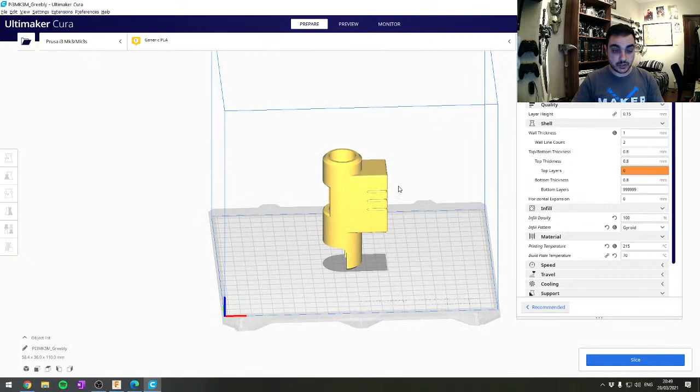Now, I don't think this is the configuration I would print it in, because this would require an enormous amount of supports. It will require supports nonetheless, so there's really no easy way to print this. I would avoid printing it on a circular side, because that would mean having supports on the circular side, which would mean a lot of sanding, and the flat side definitely.

So probably I would actually print it upside down like this. Probably, if not split. Probably I'd split it down the middle and just put two halves together.

But as an example, if I wanted to print this with a 0.3 layer height and let's say a 10% infill with supports everywhere, because I want these structures supported, like this part needs to be supported, otherwise it won't print properly. If I were to slice, it will give me an estimate of how much material and time it would take.

Something like this would take about 2.5 hours maybe to print. The infill pattern is a gyroid, so if I go in preview, this is pretty cool actually, I quite like this. This shows me layer by layer what it looks like. This is the last layer, see?

I was going to print it. Now if I go down, you're going to see the infill. Alright, I think somewhere I can change the color of the infill so you can actually see the color scheme.

Extruder, helpers. Helpers are the support structures, right? The infill...

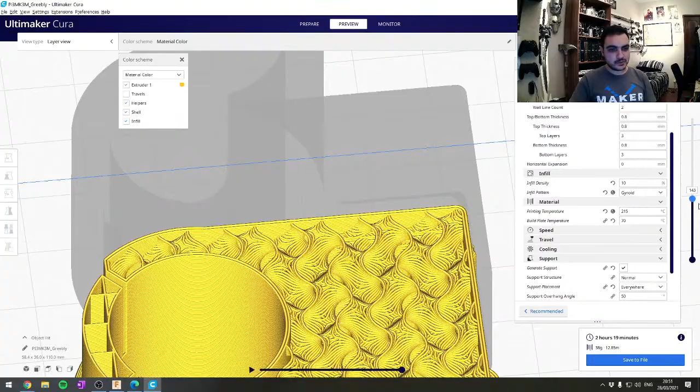Over here, see? This is the infill. That's a gyroid, so it will have this wavy pattern, which will support the inside. That takes longer to print, but it's much sturdier this way. You can have concentric, for example.

Which is a different kind of infill, a different type. See, it just has a lot of hollow spaces and I don't like it, but it cuts down time by a lot, an hour 50 minutes. I prefer the gyroid for my prints, which require a little bit of toughness and durability, so something like this would take about 3 hours to print.

I don't think the head itself... I think this is how it would build up.

Okay, now if I delete this, go back to prepare and load up the hammerhead. See, the hammerhead doesn't even fit on my printer.

Okay, so not even if I arrange models. Center selected. See, it's just too big.

It would probably fit if I sort of play around with it. Something like this, perhaps. There, see, something like this would fit.

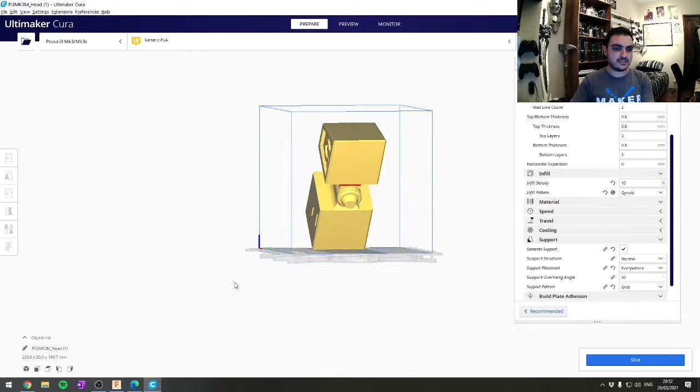I can print it in one go, but this would be ridiculous to print. Yeah, it's too chunky. The supports alone are just huge in terms of... well, support material actually is not a lot.

Actually, I might actually print it this way, out of curiosity. You're going to use the same parameters.

Holy crap, I think this is actually going to work this way. It really doesn't have a lot of support, just over here. The red parts are where the supports go, obviously under the lightning, and these overhangs over here.

But it would take 14 hours and 28 minutes to print all of it. And I'm hoping I have a reel of material which I can use. That's a long time. If we press preview, we can actually see where the supports are going. Yeah, 14 hours to make something like this.

And mind you, this is on the 0.3 mil. If I wanted to print it on very fine, like 0.15 of a mil or 0.06 of a mil, it would take easily 4 times as much or even longer than that.

Out of curiosity, let's have a look. If I wanted to make the best possible print, actually what I need to change is this, have it as a brim to make sure it doesn't come off. If I wanted to have the best possible finish on it,

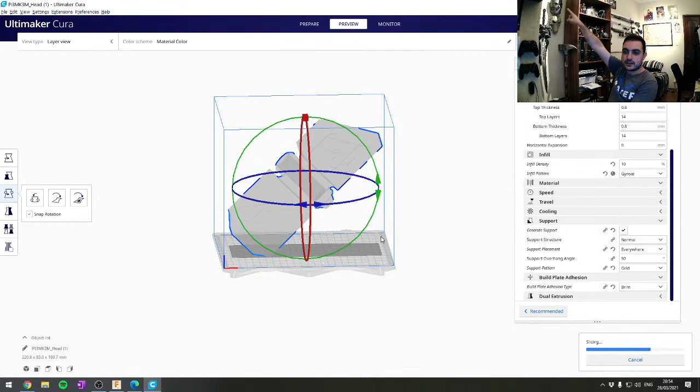I've had prints like that. I've done prints where I think it was either the Doctor Doom mask... Oh, Doctor Doom is over there. Let me help you with the camera. Doctor Doom and the Death mask from Darksiders. Those are printed in halves, and I think every half was like 12 hours each.

You might actually appreciate that, Jay. Doctor Doom's mask. Yeah.

Come on, 3 days and 6 hours, if I were to print it on the finest settings. Yeah, 3 days and 6 hours is just ridiculous. But I think I might actually go for 14 hours because it's processing like layer 99%.

It's ridiculous how many more layers it has. This is like the infill I was telling you about, right?

No, let's do it on extra fast, but we're going to keep the changes. Basically, when I click keep changes, it keeps all the things that I changed in it, right? Obviously. But it will keep its own parameters too.

The stuff that comes, it's going to change. It's not going to change only the stuff that I changed. Took me quite a while to get that.

So it's slicing now. It should be back to 14 hours and a half. Yeah.

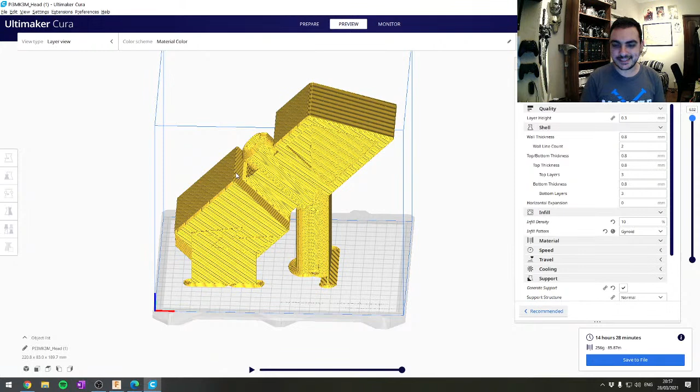So it looks like it's building up on its own. Some really cool effects. So I think that's about wraps this session up. I might actually, one last cool feature we can have a look at together is by pressing the play button down here.

This will take us through the whole process, all the steps that we did, like a small time-lapse on a step-by-step basis. I like to have a look at this because I can spot where I wasted time, where I did wrong, etc.

Cool. I hope you guys enjoyed it. I know it was a little bit lengthy and maybe it wasn't as interesting as some of the other things that I've done. This sort of thing takes a little bit of finesse and know-how to get the hang of.

Thank you very much, man. I appreciate that. So yeah, this was very interesting to make.

One last thing that I'm going to do. I can take these, right click, go on physical material, and select metal. Obviously I'm not going to be using metal for this, I'm going to be printing it in plastic and painting it. But let's say, for example, shiny, I don't know, let's say iron.

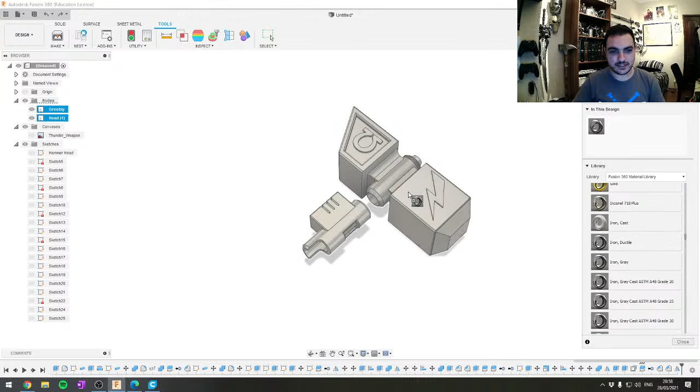You can just drag and drop iron, and now it will reflect as if it were iron. I can go, for example, for gold. See? And change it. That's pretty cool. You can also change the appearance, and it's just the texture that changes.

If I press A, wait—never mind, let's do this, and leave it as it is. Thank you very much for joining.

I really can't wait to make this thing happen now. I might go back and edit a little bit of things, maybe create a much thinner sleeve and have this part 3D modeled as well so it goes into it, but I'll do that off camera. I'm very happy with what we did over here, very happy indeed. So yeah, that's it, I think that works just fine.

Yeah, Warhammer, too much swag. Well, no expense was spared in the killing of, I don't know, Xenos heretics and Chaos Warriors.